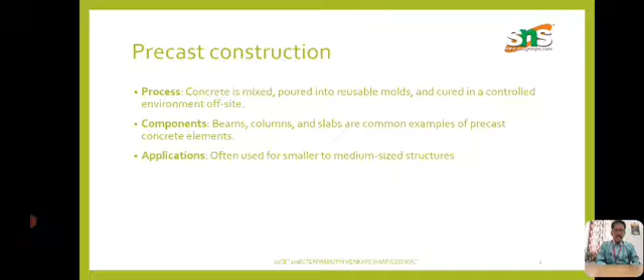Nowadays we are following precast construction in day-to-day life to finish buildings as early as possible. Nobody is ready to wait till the completion of buildings for up to 6 months or 8 months. So now we are following precast construction.

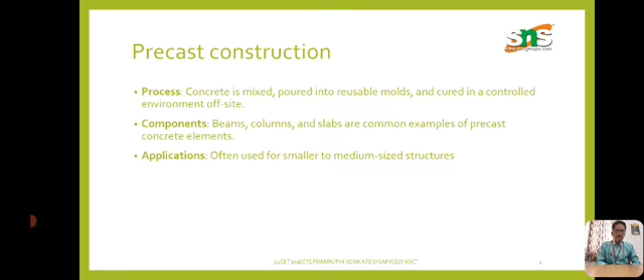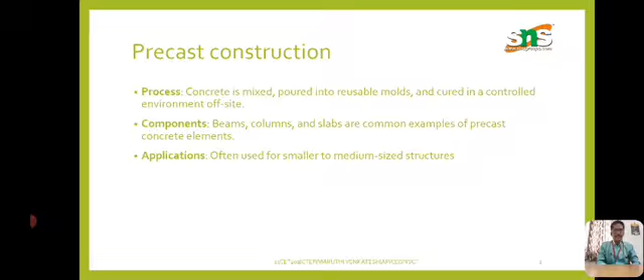In precast construction, concrete is mixed and poured into reusable molds and cured in a controlled environment offsite, because it is carried out in the lab itself, and the entire structure is taken to the site and tested there. The building can be completed by jointing different components like beams, columns, and slabs.

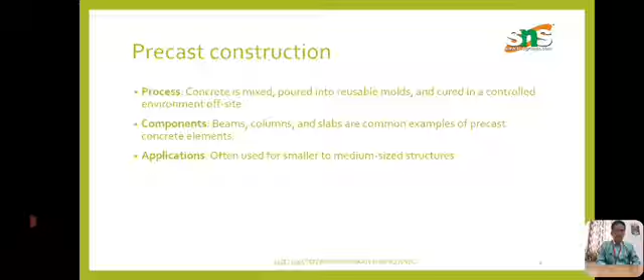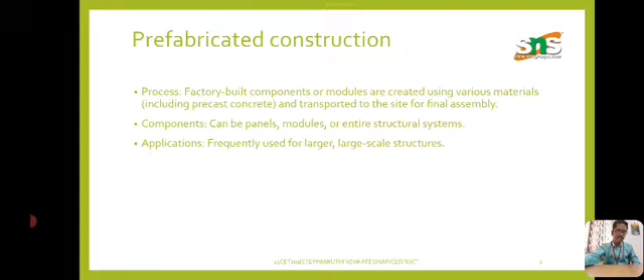These are the different precast elements we take to the site, and we place them in buildings where they are able to fit, and they can be joined with the different components of the building in an easy way.

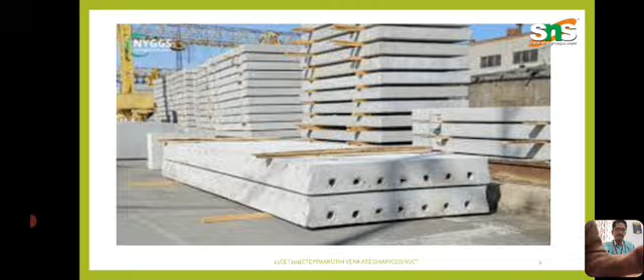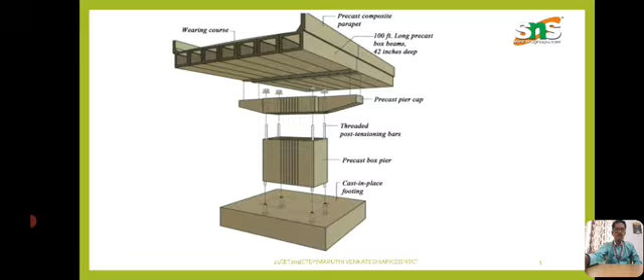Like this, the building components can be fixed in different parts to complete the structure in a fulfilled manner. These are the buildings - it is easy to make these components step by step, and the building can be easily fitted part by part to a complete manner.

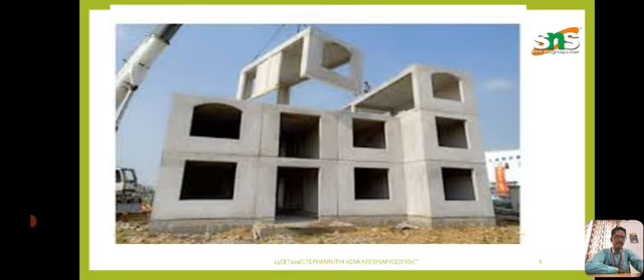These are the different parts of the building in complete manner, and the different particles made by precast concrete structures. Like this, the building can be fitted using precast concrete structures.

Prefabrication mainly refers to the process of assembling the components of the structure in a factory or other manufacturing site and transporting the complete structure or substructure to the construction site.

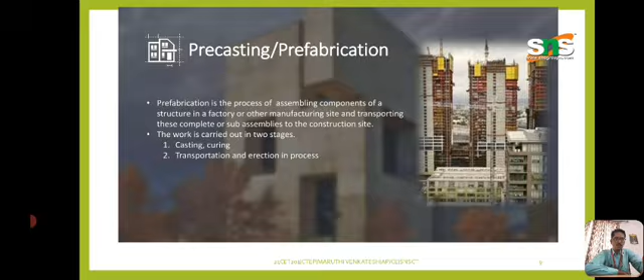The work is carried out in two stages. One is casting and curing, and the other is transportation and erection.

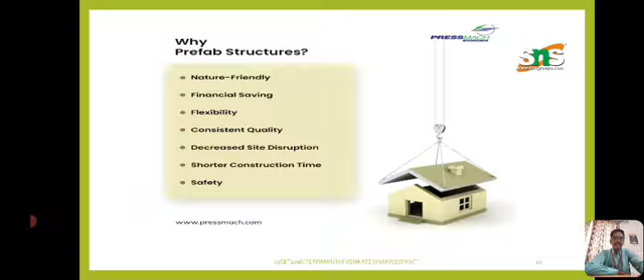Why precast structures are used nowadays: it is nature friendly, financially saving, flexible, provides consistent quality, decreased site disruption, and shorter construction time. Mainly the purpose is minimizing time period, and finally safety is also considered while constructing the building.

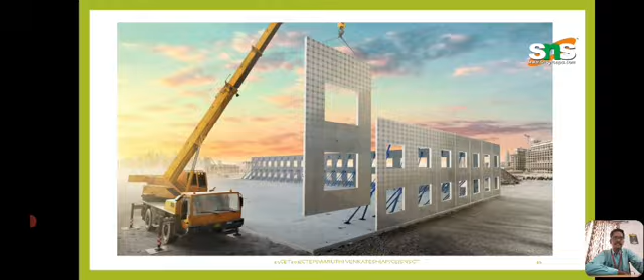Likewise, the building can be considered in a different way. These are pictures showing the precast and prefabrication process while constructing.

Here, one steel rod can be extended and fitted into another component. It should be correctly coincided with the other component, and it is inserted as a steel rod, so it can be placed perfectly and cannot cause any cracks or other issues during construction.

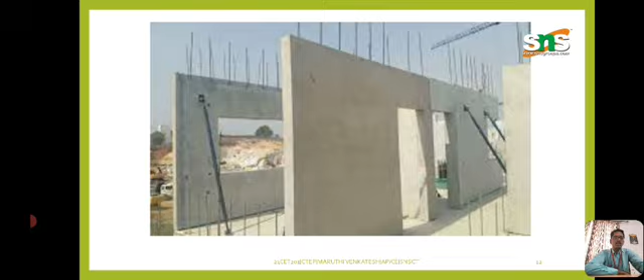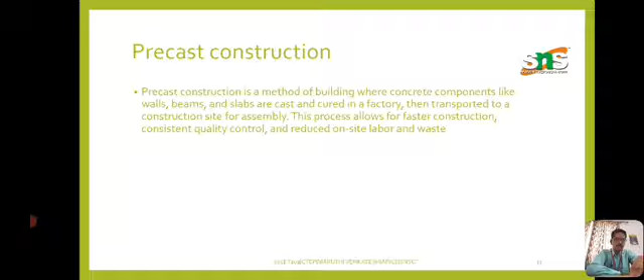Precast construction is a method of building where components like walls, beams, and slabs are cast and cured in the factory, then transported to the construction site for assembly. This process allows for faster construction, consistent quality control, and reduced on-site labor and waste. Mainly, labor can be reduced and waste can also be reduced.

Another topic is cladding. Cladding is nothing but providing an extra layer in the building to prevent heat and external particles from affecting the building or concrete. It can be prevented by using insulation so weather and temperature do not affect the building or concrete.

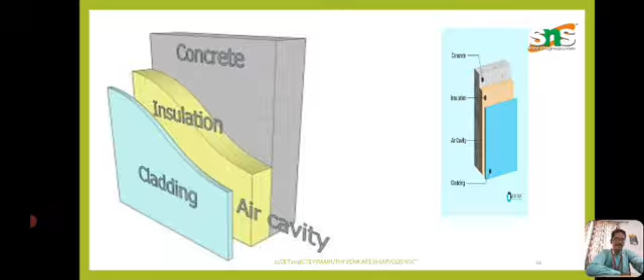Cladding is a process used to provide a degree of thermal insulation and weather resistance and to improve the appearance of the building. Cladding is an external layer of material applied to the building, primarily manufactured to provide weather resistance, thermal insulation, and enhance aesthetics. It serves as a protective skin that shields the building from elements like wind and rain, improves appearance, and contributes to durability.

Common cladding materials include wood, metal, brick, vinyl, and composites. It may be a combination of those materials.

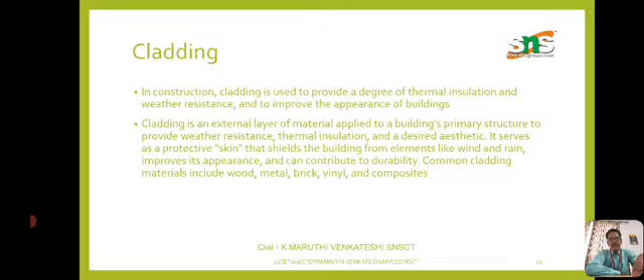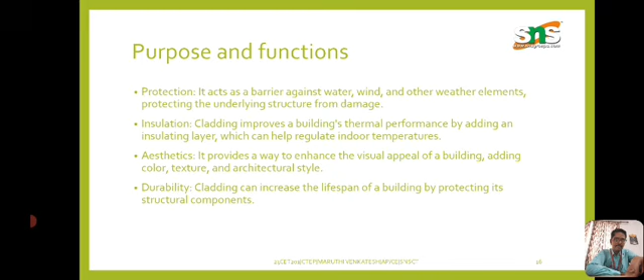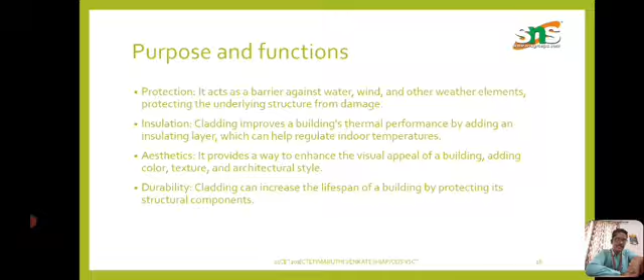Purpose and functions: Protection - it acts as a barrier against water, wind, and other weather elements, protecting the underlying structure from damage. Insulation - cladding improves building thermal performance by adding an insulation layer. Aesthetic - it enhances the visual appearance of the building, adding color, texture, and architectural style. Durability - cladding can increase the lifespan of the building by protecting its structural components.

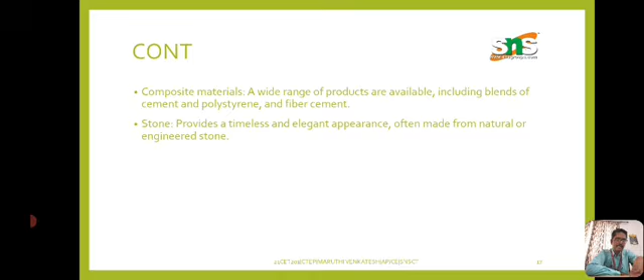Composite materials: a wide range of products are available, including blends of cement and polystyrene, fiber cement, and stone. It provides a timeless and elegant appearance, often made from natural or engineered stone.

Drainage systems, sewage treatment, and refuse disposal are interconnected systems for managing waste and water. Drainage collects and moves wastewater, sanitary water, and stormwater through pipes to the treatment plant or disposal site.

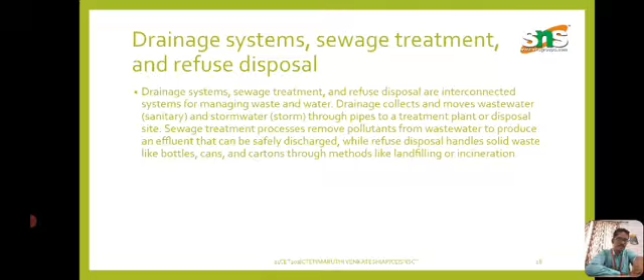Sewage treatment processes remove pollutants from wastewater to produce an effluent that can be safely discharged, while refuse disposal handles solid waste like bottles, cans, and cartons through methods like landfilling or incineration.

Drainage and sewerage systems: the purpose of this is to safely collect and transport wastewater and stormwater from a building or area to a point of disposal or treatment.

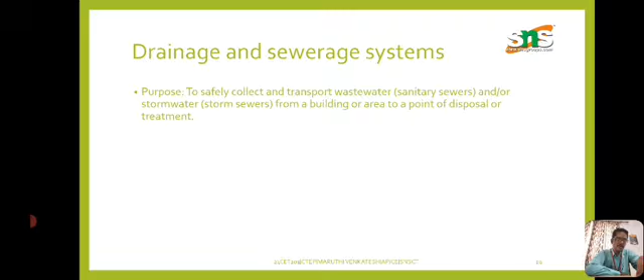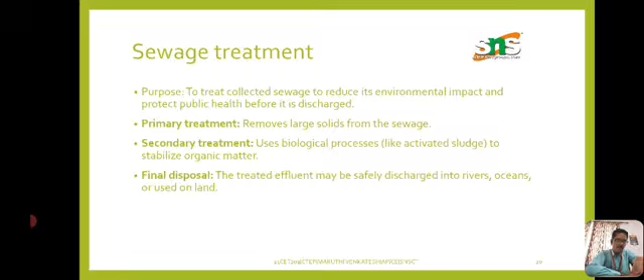Sewage treatment's purpose is to treat collected sewage, reduce environmental impact, and protect public health before it is discharged. Primary treatment removes large solids from the sewage. Secondary treatment uses biological processes to stabilize the organic matter. Final disposal: the treated effluent may be safely discharged into a river or ocean, or used on land.

Refuse disposal's purpose is to handle solid waste that is not liquid. Methods include disposal by landfilling or incineration.

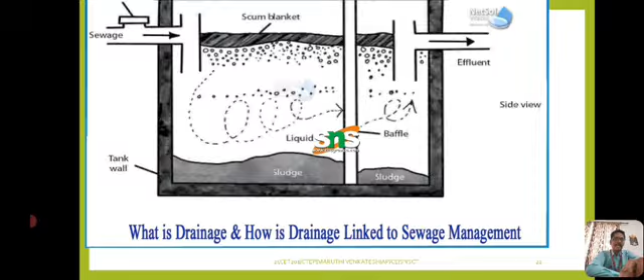What is drainage, and how does drainage lead into the sewage treatment plant? This is a type of septic tank - the sewage can be directly removed using the septic tank process.

Here we use sewage treatment to treat the water as well as to dispose of it without affecting the building, ensuring safe disposal of sewage water and drainage water. It won't cause dampness in the building in the future. So this is the main purpose of studying drainage and sewage treatment plants.